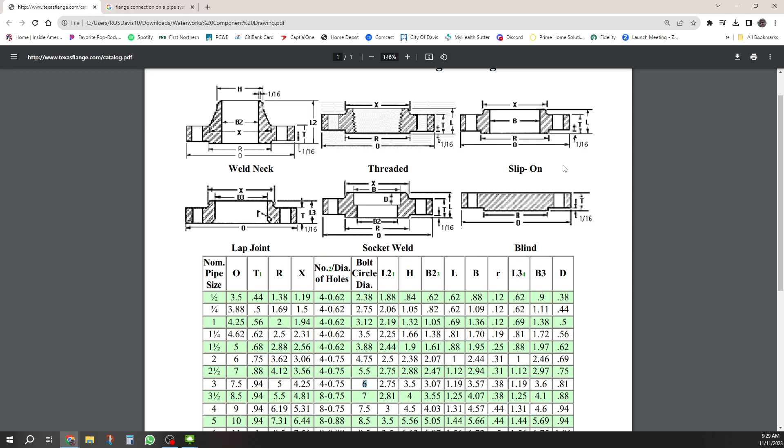So your job is to do a slip-on, a blind, and a lap joint and recreate this drawing. And then you're going to create the front view of it. This is called the section view. And you're going to make something called a block from the front view. Present them all on a piece of paper, each on their own sheet, and then plot it out. So let's see how to do that.

The first thing to do, of course, is to get a snip of this thing so I can have my data easily at hand. There it is. And I'm going to make it easy to see so that I can find those ones really well. And then I know that I'm going to have an O, a T, an R, and I'm going to have to worry about this one and this one. Okay, so now I know what values I'm going to have to look at. Okay, so it'll be easier for me to read this if I've got this all figured out.

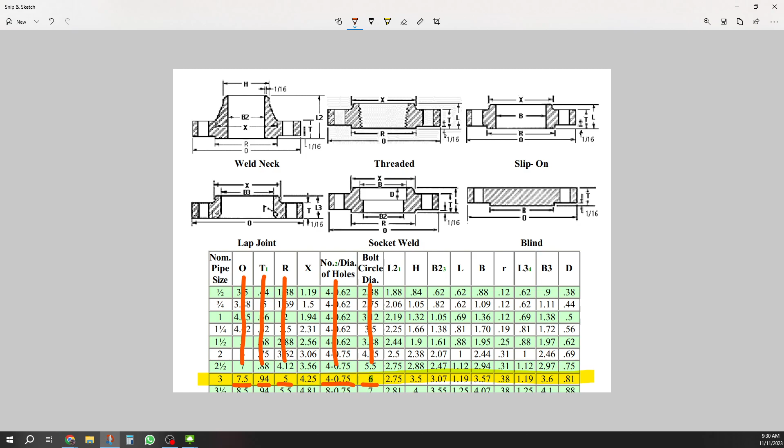Okay, so now it's time for AutoCAD. I'm going to do all of my steps, so I'm going to open a new one. And I have to do all of my setup that I always do. I come to the bottom and I set it up as I've been doing every single drawing that I've done so far. I don't need clean screen, so there we go.

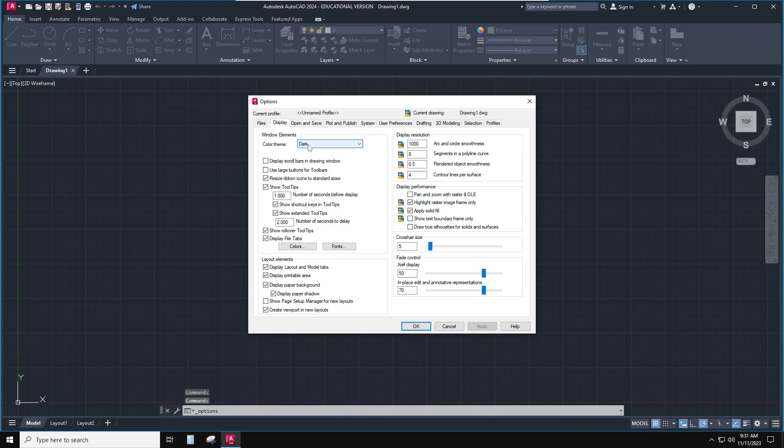That looks pretty good. And then I use a white background as my personal preference, and I use the light. So those are my preferences, and I do my setup. And I turn off my grid, and I always check my units just to be sure, and this should be inches, decimal inches, so I'm okay. And I might want to see a little bit more precision on my decimal degrees. Okay, so there we go. I'm all kind of set.

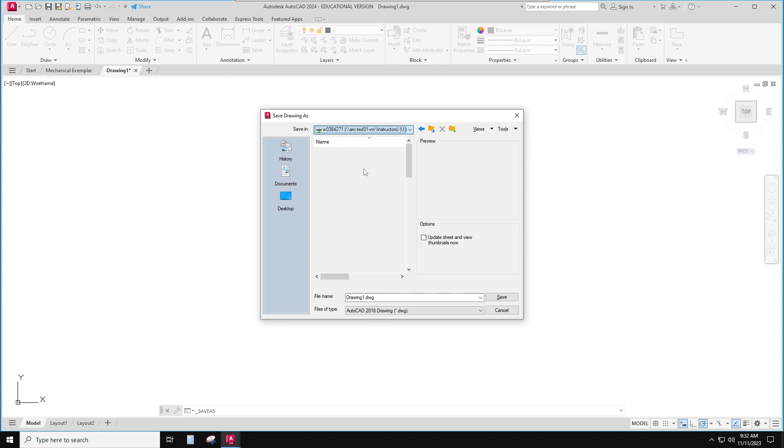And then my other thing to do is open my mechanical, and I think I've got those ones in here. There's my mechanical exemplar. So I've got my exemplar open. I've got my drawings one, which I'm going to rename now. So I can do a save as and go find a spot for, oops, sorry about that. I got to put it in the right place. Here's my 301 fall, and I probably need a new thing. I'll stick it just in here, flanges.

Okay, DC, because now I need to load things up, open drawings, and I don't want them from flanges. I want them from my mechanical, and I know I'm going to need some dim styles, and I know I'm going to need some layers, and I'm going to need a layout, and the instructions say mechanical A. So I'm going to put a mechanical A in there. And I'm going to show you more with that layout in a little while. I think I've got everything I need. I can probably close my design center so I have more room to draw.

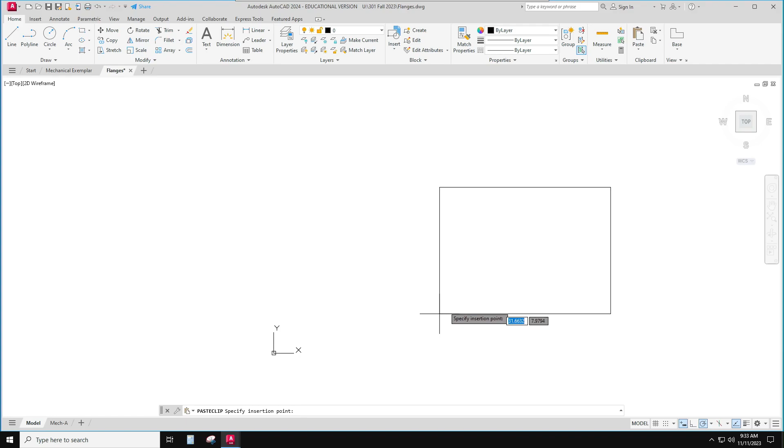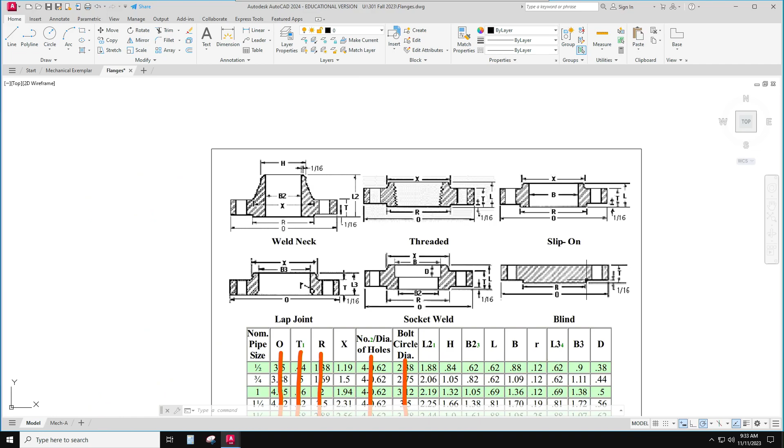Now I took a copy of this thing already. So I'm going to do the most simple one, which is my blind flange first. And I'm just going to draw this. And I see that it's mostly a rectangle with another rectangle. And sorry about that. I've got kind of lots going on there. And it's not a tracing. I have to draw this right. So I'll put that on my geometry layer. And it's a rectangle that is 7.5 by 0.94.

7.5 tab 9.4. Oh, my numlocks aren't working. 7.5 tab 9.4. 0.94. Let's get this right. I'm not doing a very good job on my demo here. 7.5 tab 0.94. There we go.

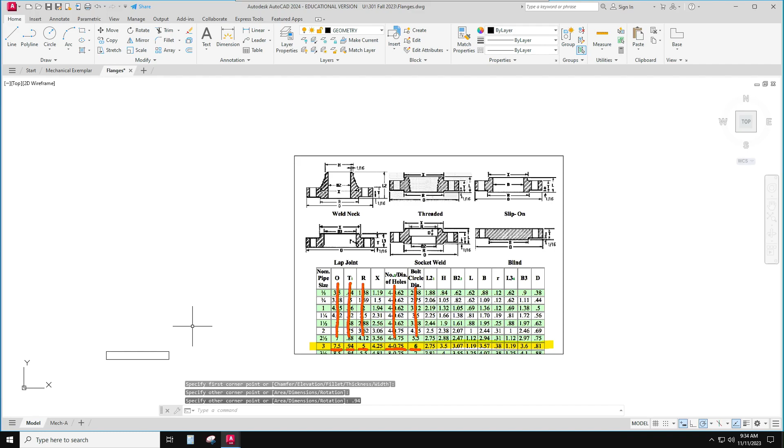And then there's another one that is R by 1/16. R is 5. 5 tab 1/16, enter. And I can move this so that my midpoint, I need to have midpoint selected. I somehow have turned off my O snaps on accident. There we go. Midpoint.

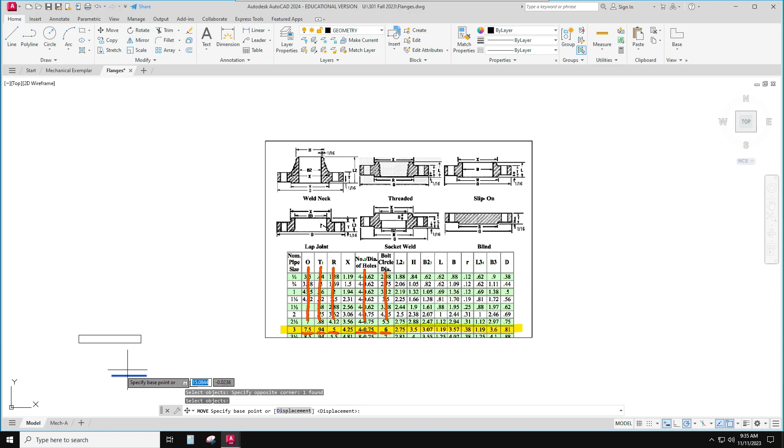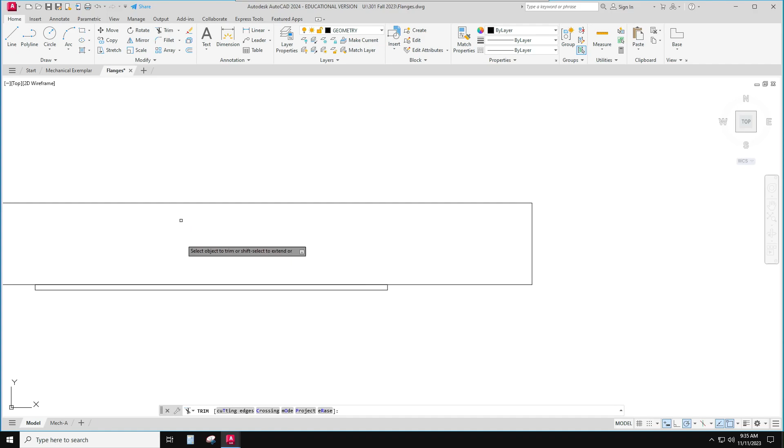So I need to go from the midpoint to the midpoint. And then I'm going to need to trim some stuff away here. Definitely need to trim that away. And then I need my holes. And I think I said that they're on a 6-inch bolt circle. So I'm going to use the center line.

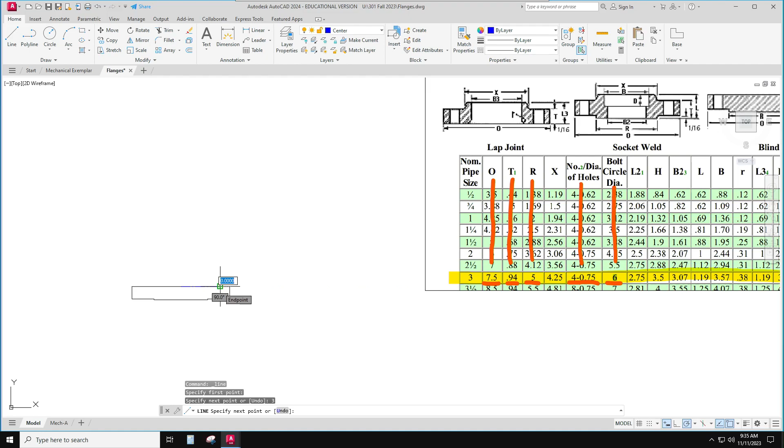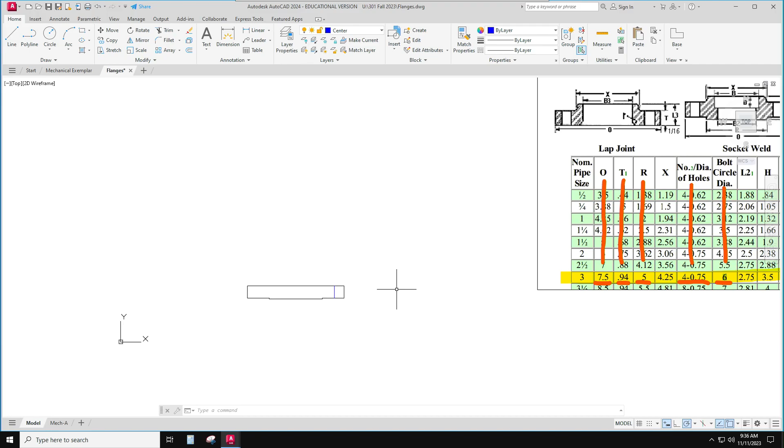It is on a radius of 3 and down. That's going to be the center line of it. That's the center line. And each one is 0.75. Each one is 0.75. So there's a lot of ways to do this, but I'm going to offset

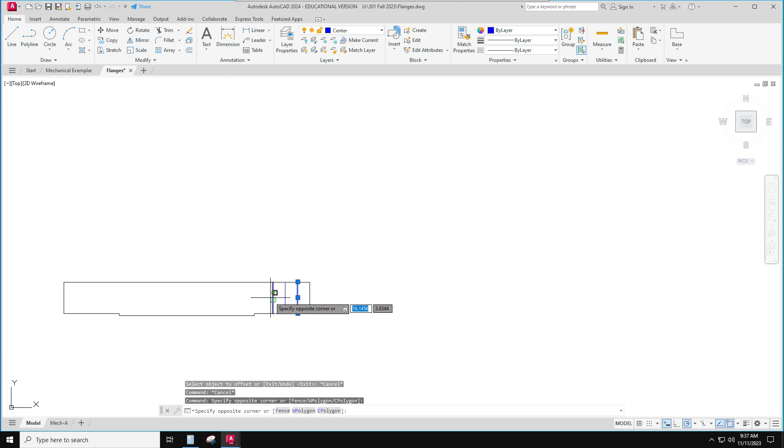0.75 divided by 2. I wonder if it'll let me do that. Nope. So what is 0.75? I know it in my brain, but 0.75 divided by 2 is 0.375. So I'll offset 0.375. Either direction. And then I have to realize that those two are now on the wrong layer because those were center lines and they should now be geometry lines.

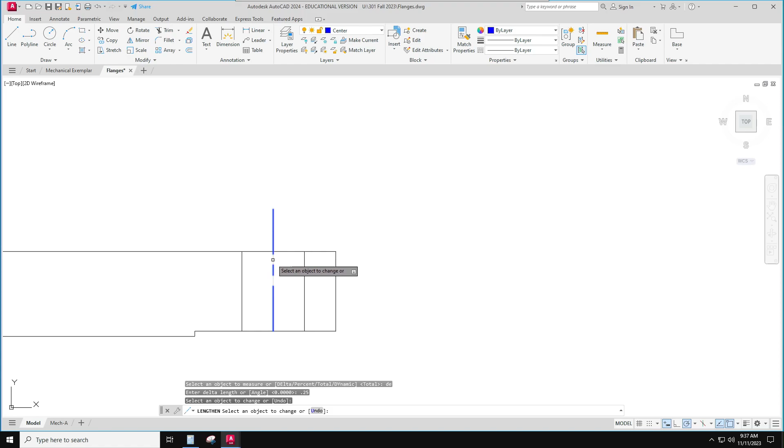Here's another cool thing. If I want to lengthen that so it looks more like a center line, I can go L-E-N, lengthen, enter, D-E, delta by a given amount. And I'll do it like 0.25 inches. Now I have that cool looking thing. And to get the other side, I would mirror.

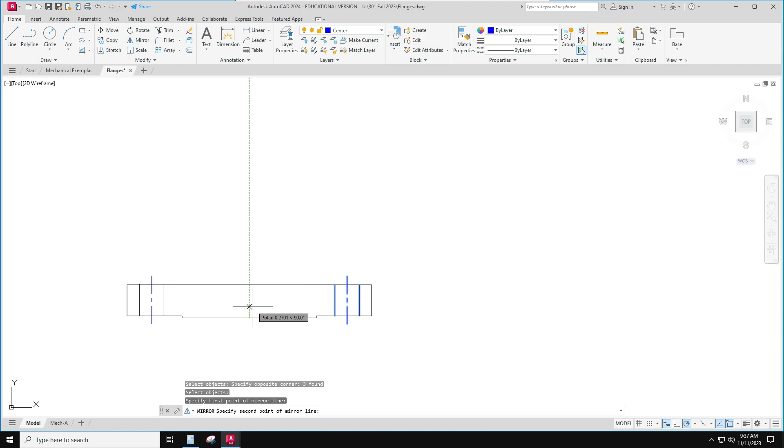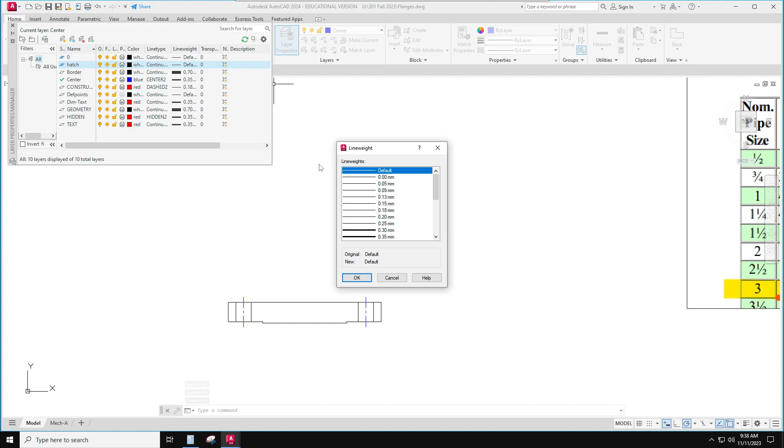There we go. And my last thing to do is put in a hatch. And I'll put my hatch on, I think I just need a new layer. I think I'll have to put in a hatch layer. So I'll make a new layer called hatch. And once I've got that, I'll probably make it up and see, there we go. I need to get my line weights right. And there we go. Always something to work on as you're setting these things up.

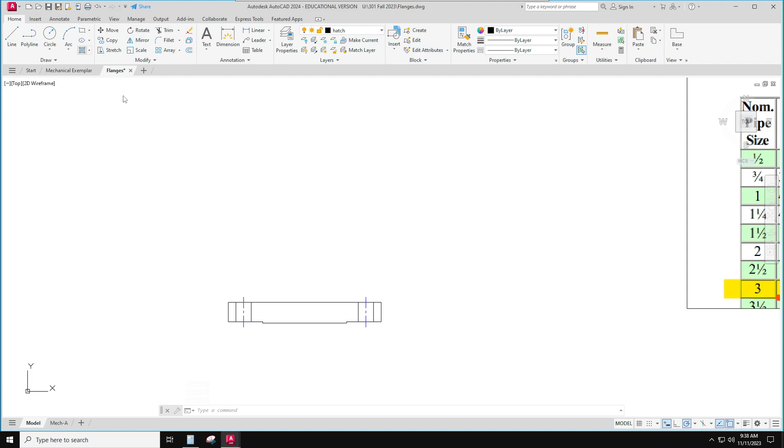So my hatch, I'll make them 0.014, fairly light. I'll set my current layer for hatch, and I'll do my hatch. And I'll just use this ANSI 31. That's a very typical general hatch that you can use. And there we go. I've got my slip-on done. And so then I'll do another video to show you what to do after that.